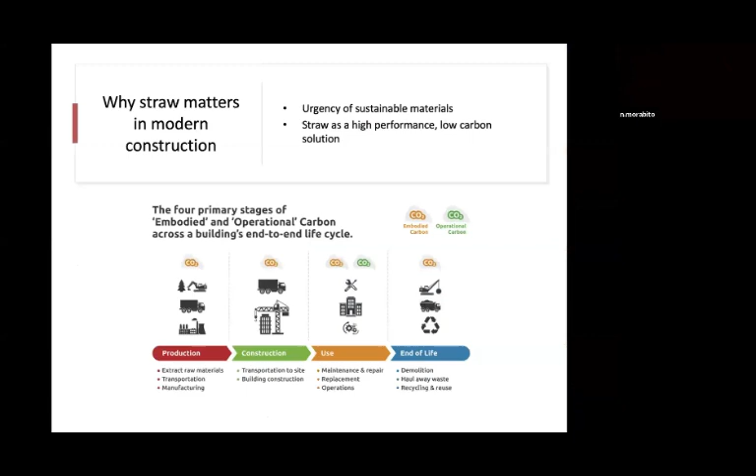So why does straw matter, and why is it important to use it as a sustainable material? Well, I'm going to make this very wide-sweeping assumption that you're either architects or engineers, or you work in the built environment, or you have quite a high level of understanding about carbon emissions: operational carbon is very high within the globe, okay? We use a lot through production, through construction, specifically through maintenance and repair and replacement, and it just is not in a good position for us at the present moment in time.

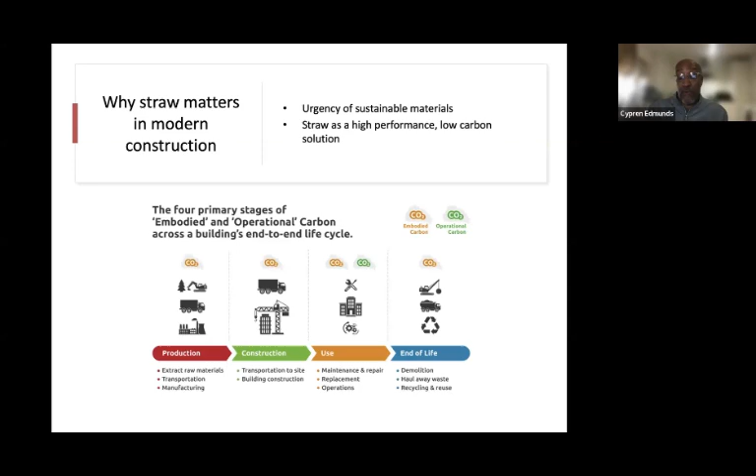We really need to rectify this because there are a lot of alarming targets or numbers that people are throwing out, and we need to address this as soon as possible. And straw, as a bio-based material, is a solution.

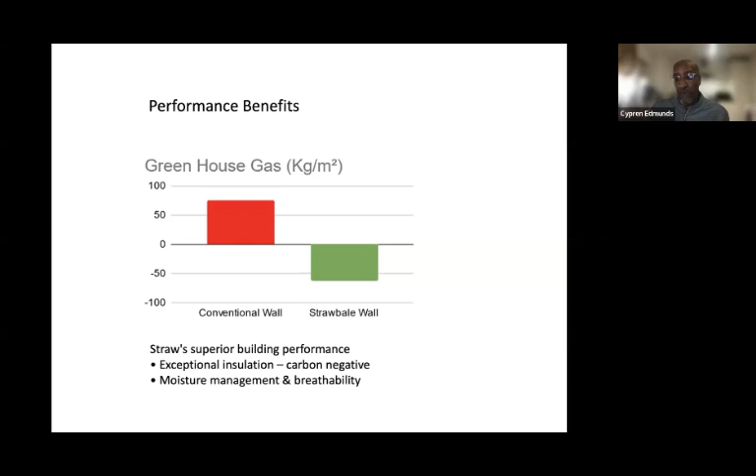In this image, what I wanted to highlight to you are some real world examples, okay? The picture on the left-hand side is of a contractor using blown-in straw. So straw is coming up through the pipe and into the walls, okay? There are very many different methods with which you can use straw, and you can apply it through this method.

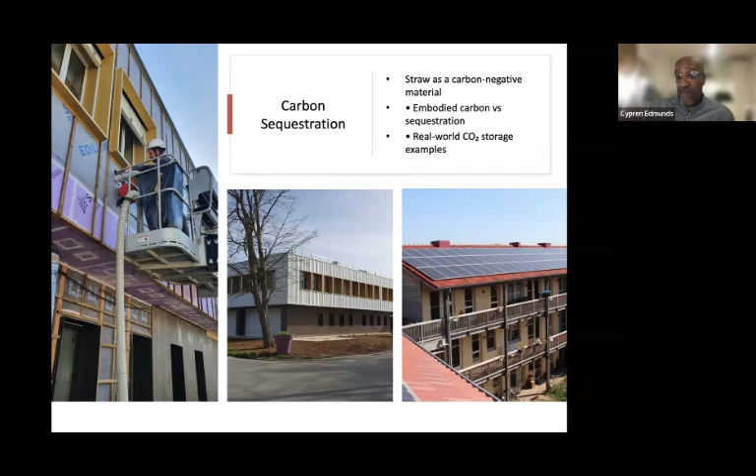The middle image is of a modern looking facility, and on the right is of a domestic or social housing setup. So if people were to say to you, were these sites made of straw? You can say yes, quite confidently, because one of the misconceptions that people have is that straw buildings do not look modern. So it has meant that architects and engineers, surveyors, and the major housing developers are put off wanting to build with this material. You can see that this is very futuristic, it's modern, and it does what it says on the tin.

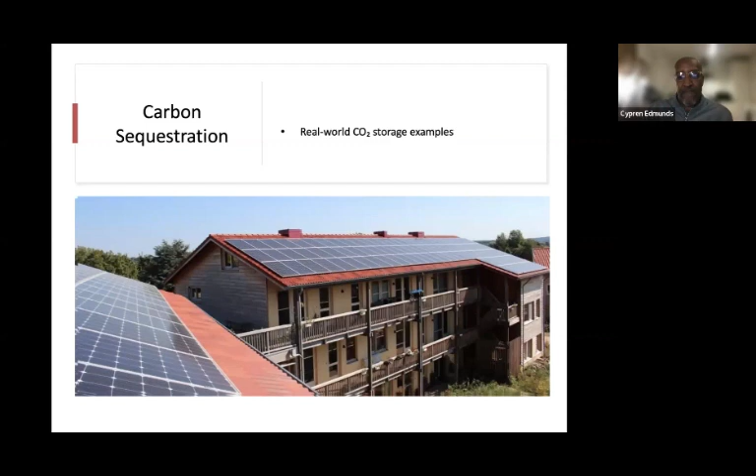An extended and more expansive picture from the image that I showed you in the last slide, you can see they have all of the mod cons. There's absolutely nothing wrong with this site whatsoever, and it's very appealing, very aesthetic to the modern eye. Let's go to the next one.

The modern applications. For many people, building with straw comes across as quite a labor-intensive aspect, okay? So there are different types, as I showed you just a moment ago. You can have blown-in straw, or you can have straw bales, or as we're moving into the 21st century, there's engineered panelled systems.

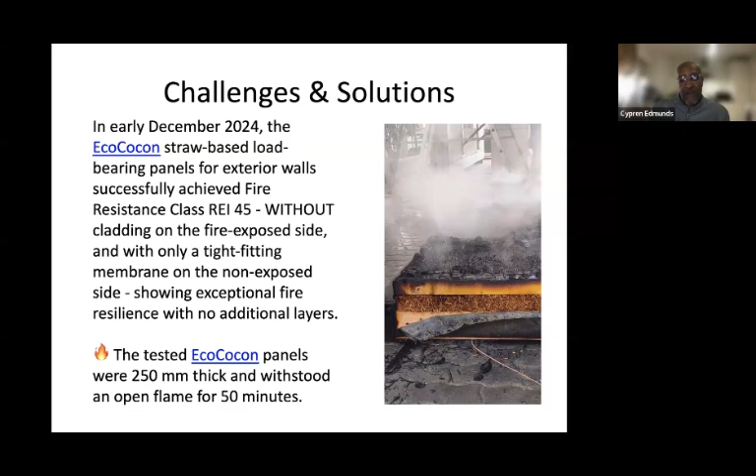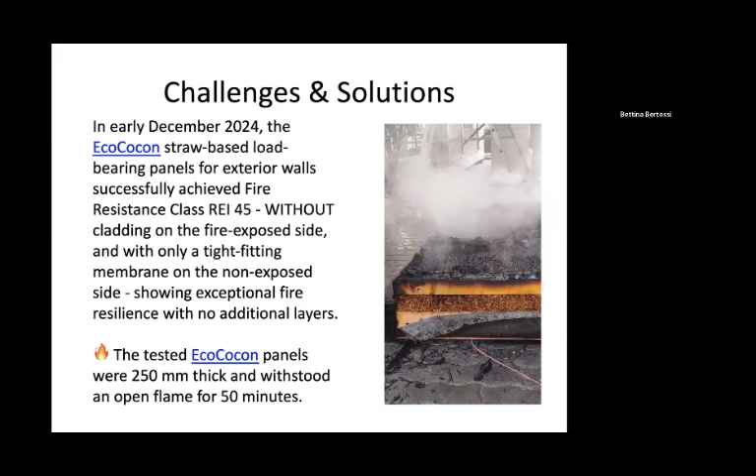So, the future outlook, what's there for us to look at? What can we do about all of this, and where does the innovation come from, and what precisely can you do? For those of you who are sat at home and who are in your office listening to this, what's next for straw? So my call to action, call to arms, is for you to join a local network, to work with others, to find out more information. And if you don't have any information, I'm going to put in the chat some organizations that you can reach out to.

It's very important for us to enhance this because we really do need to address the carbon emissions that we are emitting out to the atmosphere. If we don't do that, then we're not going to be reaching any of the targets that the governments are suggesting that they want for us to work against. Okay. Policy shifts and mainstream adoption. That means you have to speak to your local member of parliament.

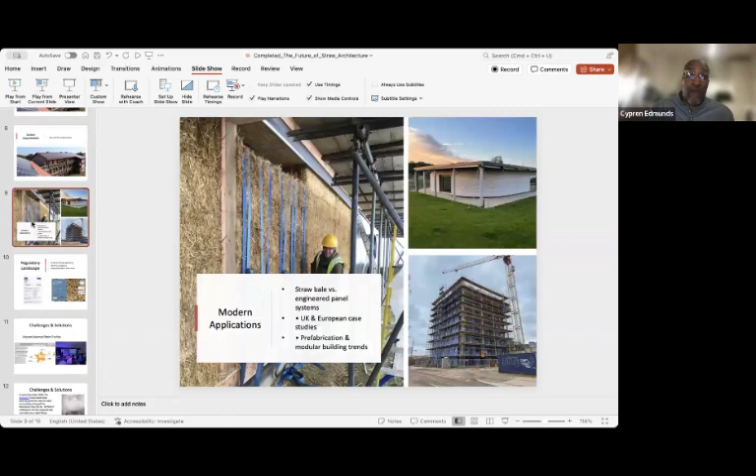And can you show it again? It's a timber frame. Let me go back to that. It's a timber frame, and the organization that is responsible for it is EcoCocon. So this is the one, the bottom right. This is presently under construction, and I will share the slides, and I'll also send you the links to the architects responsible for it. Okay, so all the information and the drawings are on their website, and it's all freely available for you to see. And they want you to see this because this is a huge moment.

You know, it's the tallest building in the world made of straw, and it's happening in Sweden. It's fantastic. I'm really, really happy for Bjorn and Paul and everyone else within EcoCocon and that team, because they've really worked hard to bring this to the public's attention, because it really demonstrates, if I'm honest with you, how far we've come and where we can go with this. One of the things that a lot of countries are dealing with is homelessness, certainly within the UK anyway. And if local authorities want to scale and want to build taller buildings to house many more people, then this is the perfect way to go.

Because at the moment, a lot of the organisations, certainly within the UK, they're just using the same old methods, you know, concrete and steel, which means in about 30, 40, 50 years' time, we're going to be renovating those properties again. Some people call it rehabilitation. In the UK, we call it retrofit. So in 50 years' time, we'll be retrofitting those sites again. So what EcoCocon are really demonstrating to people is that this is going to be the future and this is the way to go.

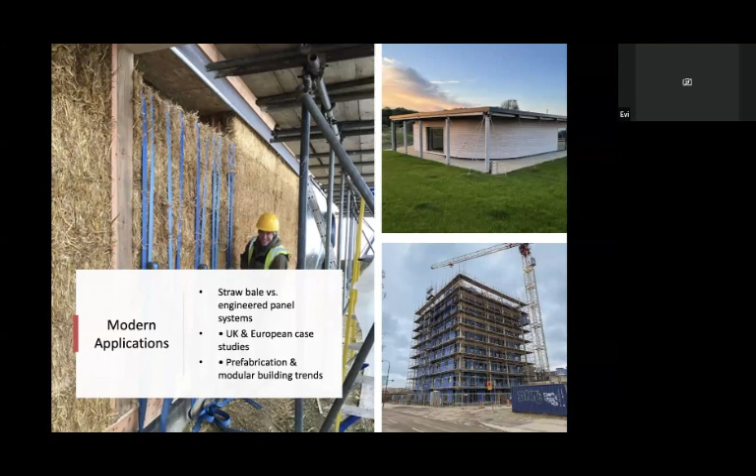Maybe I can just add that one argument for using blown-in straw instead of straw bales is that the lambda value is much better. So we have got a lambda value of 0.041 or 0.042, and I think that generally they calculate with 0.052 for straw bales. Which means that you can make a thinner wall, which is very often an argument. So the wooden structure can be lighter, not so big, and you can build it at lesser cost. And also it's more reliable when you build it in a prefab environment, like in a timber construction company, and at a bigger scale.

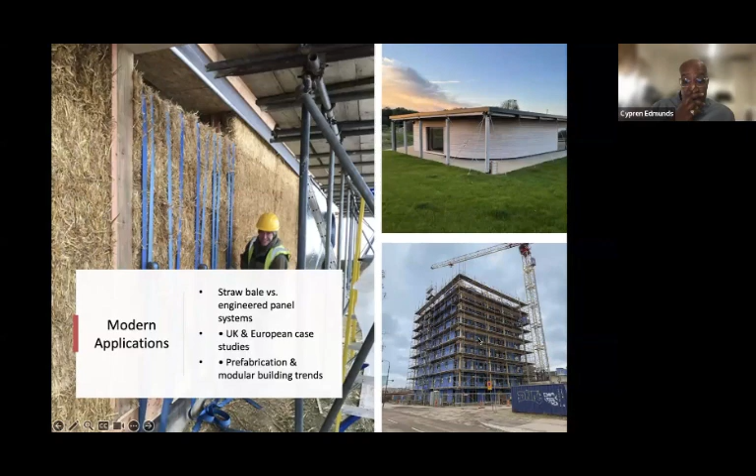Yeah. I think you're doing such a good job there, Thomas, because, whoops, I've gone back, there's a lot to be said about that, you know. Can I stop sharing? There's a lot to be said about that. I think we're just scratching the surface when it comes to blown-in straw, and I've heard so many positive remarks about it too.